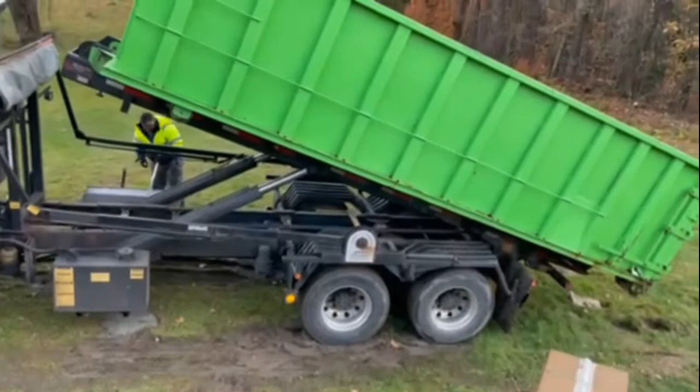Now, when his install is complete, he'll send some glamour shots and we'll check those out. But in the meantime, let's see what his install looks like as it's in progress. I should be able to play it here. Yeah. You can see here that the dumpster is being removed from the premises, which means roof tear-off has been complete. Very exciting step in the process. Once they start installing the solar tiles, they don't need the disposal any longer. Most of the fasteners have already been installed, and the ones that have yet to be installed, of course, don't have refuse associated with them.

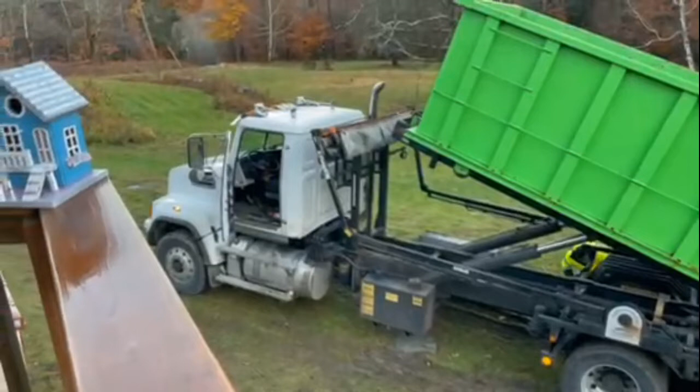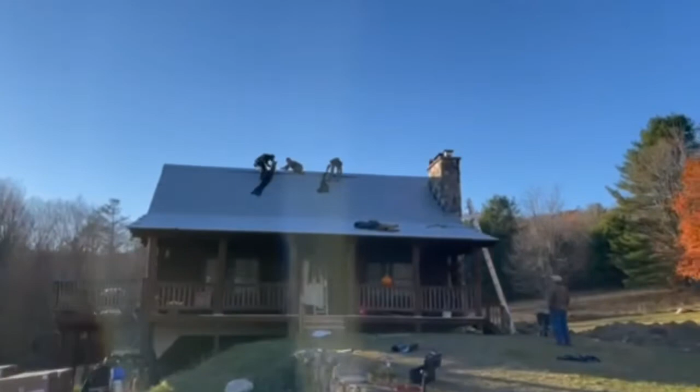Let's take a look at that next clip. You can see here that the underlayment's been installed. It's much later in the day. It looks like it's the same day, in fact. And he's going to give us a little look around the house. As we come around, we're probably on the north side now, coming around to the east side, and we'll end up on the south side of the house.

I probably have that wrong, actually, because the sun is setting on this side, so we're probably coming around to the west side of the house. That's why it's illuminating this side of the house specifically. And that deck goes all the way front to back of that house. That's very, very nice. Oh, and it's a log cabin look. Very cool. You can see the underlayment here on this other side. And they're lifting the underlayment, getting it in position right before they adhere it in position.

Very cool to see them working, and huge congratulations, Brian. We can't wait to see the video of the end product. It's going to be awesome.

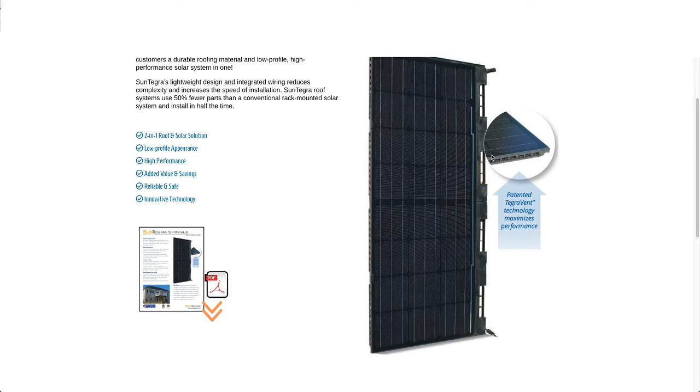You see here why the future is bright for solar shingles. But if you look at the photo, I mean, that looks like solar panels to me. That's the only photo I see. I don't know. Let's look at SunTegra. Let me pull that one up. So these are the SunTegra solar shingles. I don't know. It doesn't look that great from this photo. Scrolling down, I see some resemblance to the Tesla solar roof tile, but they don't look very good.

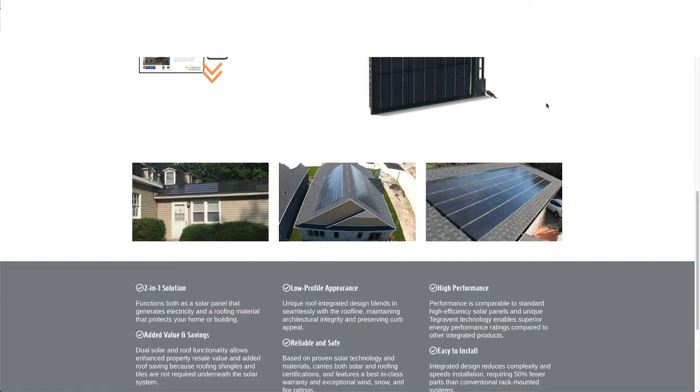And these photos down here, again, they just look like regular solar panels, or maybe like slimline solar panels. You know, they do have two products though. So let me pull up the other thing. Those were the solar shingles. That other product they've got are called solar tiles. So let me pull those up. So this is the page with the solar roof tiles.

You can see that they've got the title over the solar tiles themselves in this render. I think it's a render. It might be a photograph. It's really kind of hard to tell. But from this angle, I'd say it looks okay. Let's take a look at the other photos that we've got in here. Do we have some more photos? Yeah. So, I don't know. Just from other angles, it doesn't look that good to me.

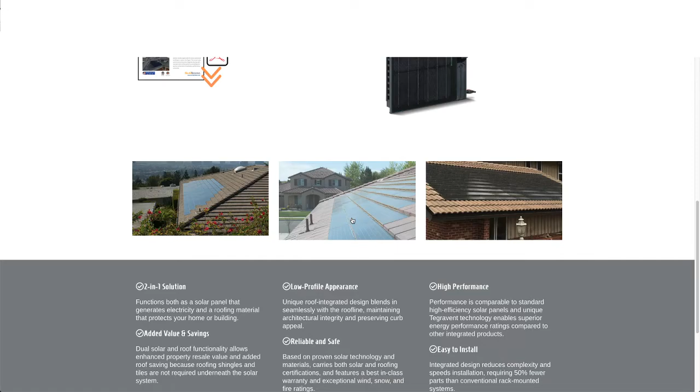It just depends. If you're looking from that rendering angle, it looks pretty good. But these more oblique angles, not so much. So, I don't know. I'd say it's all not very encouraging. Maybe Luma's the one that really offers something compelling. Let's take a look. Let me pull it up. So this is Luma Solar.

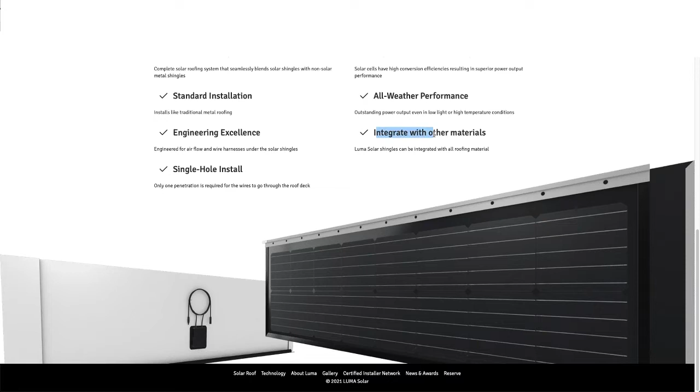And they don't even show any photos. This is just a product page. And they point out right here, integrate with other materials. They call it a solar roof, but it doesn't look like a full system. It's just a tile. And because it notes integrates with other materials, it's probably because you'll need those other materials to finish the roof.

And that sucks. It sucks. What kind of garbage content is Forbes proliferating with this? I was legit excited to read the article just to find out this was absolutely useless. So, I don't know. I'll be hard-pressed to be citing any other Forbes Advisor content from now on. Just a huge waste of my life.

All right, let's pull up the next article. This one is from Torque News. They are talking about the Tesla Solar Roof competitor, MegaSOL. Let's take a look.

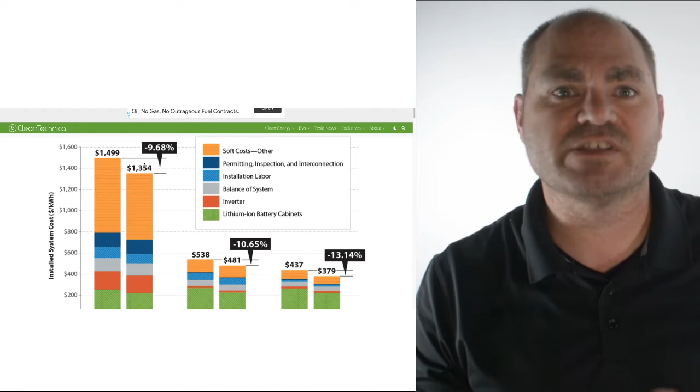Let's go to a real news outlet. This one is CleanTechnica. They bring us great new energy articles, a lot of them in depth. Some of them can be fluff articles, but for the most part, they're pretty solid on information. And this one gives us a breakdown on NREL's annual cost report on solar generation and battery storage. Quote, let's take it full screen.

Costs continue to fall for residential, commercial rooftop, and utility scale PV systems by 3%, 11%, and 12% respectively compared to last year. In a change from previous years' reports, balance of system costs have increased or remained flat across sectors this year. However, this increase in balance of system cost was offset by a 19% reduction in module cost, causing overall costs to continue their decade-long decline.

End quote. And this is part of why the transition to renewable energies is inevitable. They're just going to be the cheapest, best option. In spite of those soft cost increases, the overall cost has decreased because the modules are so much cheaper to make. The higher scale they achieve, the more cheaply they're going to be made. And those soft costs, of course, got my attention. Why are they going up? What do they consist of? So let's take a look at what's in those soft costs.

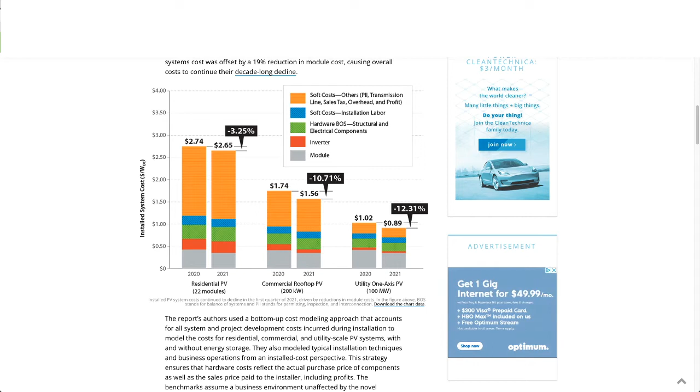If I bring this full screen again, it's the smaller version that has the inset that shows the soft costs. You can see the following: the PII, the transmission line, the sales tax, the overhead, and profit. But of course, what the hell is PII? It took me a bit to find it, but it's in the tiny printed notes. Way down here, I can barely read it. I know you can't. But it says that PII is permitting, inspection, and interconnection.

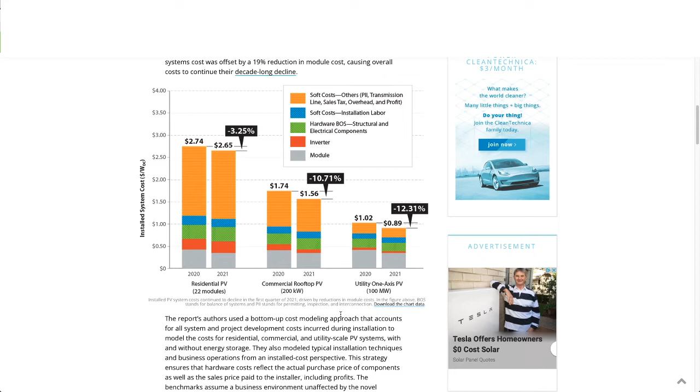Well, let me be the first to say that I want a further breakdown of the soft costs. It's 2/3 of the total costs of PV systems in general. Just look at that. If you include installation labor, we're talking almost 3/4 of the system.

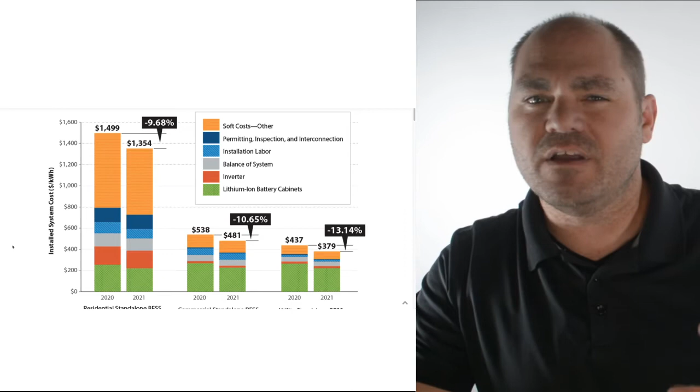And I don't know, can all that really be taxes and profit? I mean, it's enormously suspect. If you take every $2.75 in the smaller graph, $1.50 of that is not in any way related to the material cost for installation. It just, I don't know.

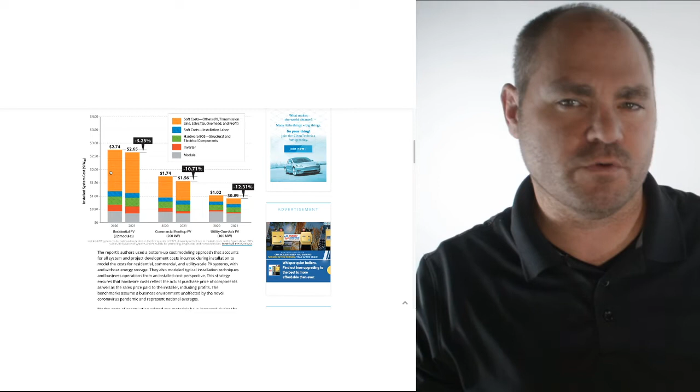Maybe some of this could be tariffs on the imported solar panels. Is that what it is? I mean, the rest would be, what, sales tax and administration. But isn't the administration for permitting, inspection, and interconnection, isn't that all like government fees? I don't know. If anyone's watching and has some insight on PII and the other soft costs that go into this, send me some resources to read so I can get a handle on this.

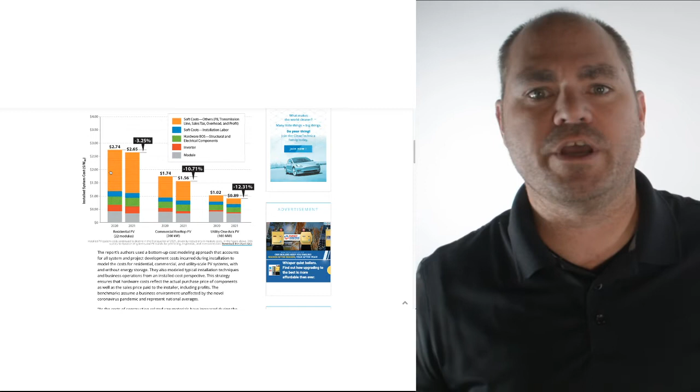But in spite of these soft cost increases, the overall cost still went down. So I expect this report doesn't take into account government incentives in any way, because those are going to be on a rebate basis. So you have to outlay the cash first and you would get money back from the government later. But I'm sure there's more to this story. If you know about it, please educate me and educate the rest of us.

It'd be awesome. And let's take another quick break. When we come back, I'll give you a quick preview on my wind energy research.

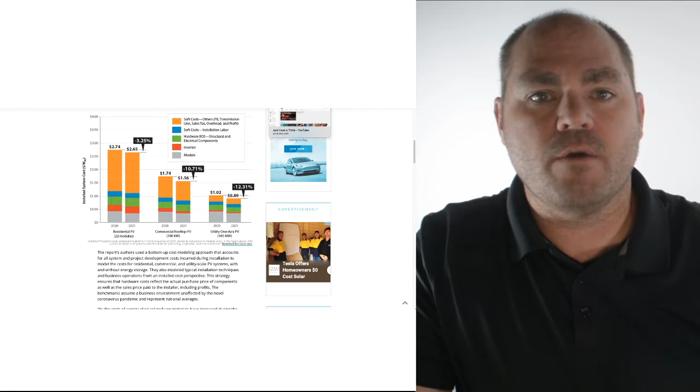So I did a lot of research on wind. I just wanted to see what options there are for, you know, beautiful small footprint options. Something that I might want to put on my own property to supplement the solar roof's electricity generation. Because I can't read, I started on YouTube, like a lot of us do, right? I'm not alone, I hope.

A quick search on YouTube revealed that there are 2 main wind generation options. I mean, I kind of knew about them. There was HAWT and VAWT. HAWT, you'll probably know as horizontal axis wind turbines. This is what most of us are familiar with. They're the ones that go around like airplane propellers. VAWT is a vertical axis wind turbine, and I knew these as egg beaters when I was a kid.

I grew up in Modesto, California. We used to go over the grapevine to the Bay Area, and you'd see these crazy, like, I don't know, heart-shaped, parentheses-shaped windmills we called egg beaters. But let's get a quick introduction from another YouTube channel called Just Have a Think. Here's a clip.

They do have some advantages though. They're obviously much more compact than HAWTs, and they can take energy from the wind regardless of which direction it's coming from. HAWTs have to have an extra mechanical setup inside the tower called a yaw system, which turns the turbine into the prevailing wind so that the blades can keep rotating. So vertical axis turbines have the potential to provide very useful energy in more urban settings where space is at a premium.

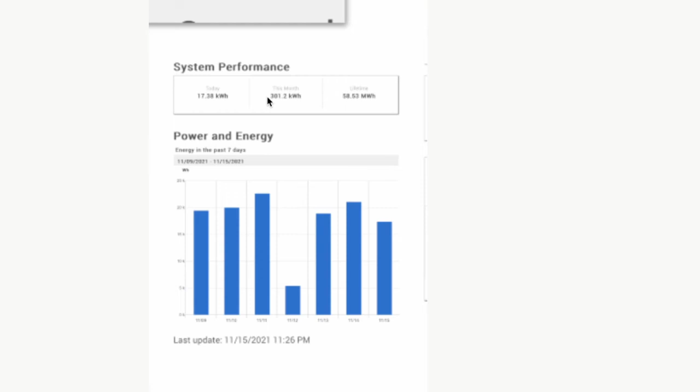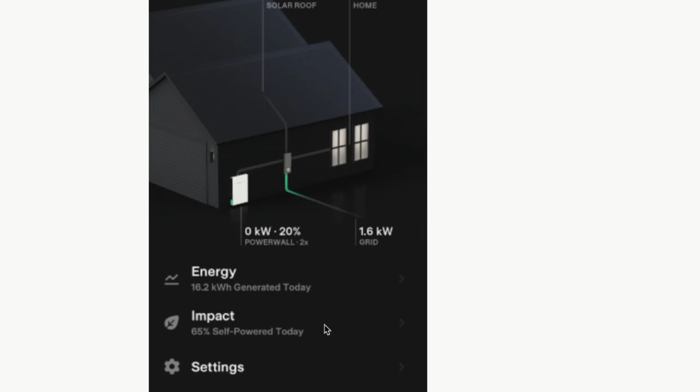For the month, though, he's only at 301, so I'm almost 50 kilowatt hours more than him over the last 15 days. But today he generated 17.4 kilowatt hours of energy. And if we look at my daily generation today, I only generated 16.2 kilowatt hours. So it's a little bit of a reversal from what we were seeing last episode anyway, when we took a look. And when we zoom out, we see that production's pretty close this month. I wouldn't say that we're pulling way out ahead, but it'll be interesting to see how they compare over these winter months.

We are still on track to cover only 40% of our current electricity usage, though. There's just got to be a way to produce more of our electricity ourselves. I'll bet the movie Back to the Future was probably eerily prescient with their Mr. Fusion portable reactor that works on garbage. That'd just be so funny. And, I mean, straight up, how awesome would that be if we could fusion our garbage to make more electricity than we ever dreamed of making?